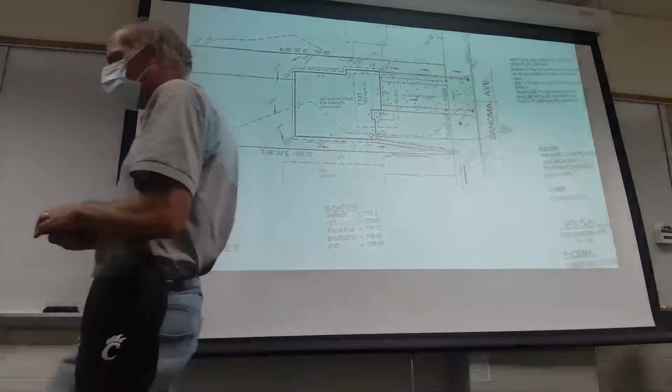It's a nice little introduction thing. This is residential. After we go through this and get a break, we're going to look at a commercial job a little bit. For right now, we just want to start here. I don't expect you to know everything on these papers. In fact, let me do this: look at it for about 5 minutes while I go make this into smaller form. I'm going to print this smaller so it fits on the overhead projector better. Otherwise I'm going to be sliding that thing all night long, and I don't want to do that. Just kind of look at it.

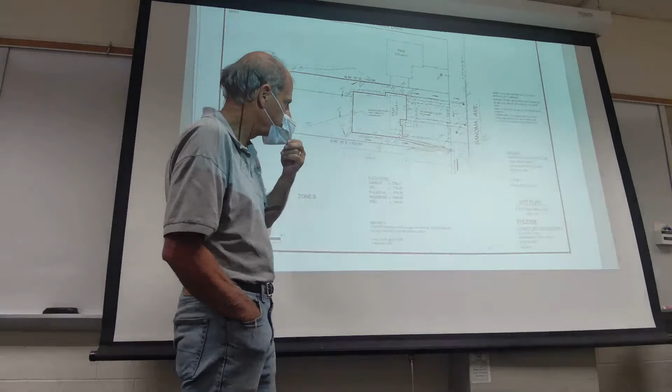You can see the perimeter, the outline of the thing, and some of the setbacks happen to be in, what is it, Madeira, I believe, or Madisonville. One of those places out there has some screwy setback requirements. They actually measure to the gutter line, to the overhang, where the rest of the world measures to the foundation line.

So in that case, I probably, because I think that's kind of a dumb rule. Not that I don't understand what they're saying, but it's just not typically done that way anywhere else. So they actually have a gutter line dimension setback, front, side, and I guess I did the rear too, just to be kind of snotty about it. But most of the time you're looking at the actual foundation, the outside of the foundation.

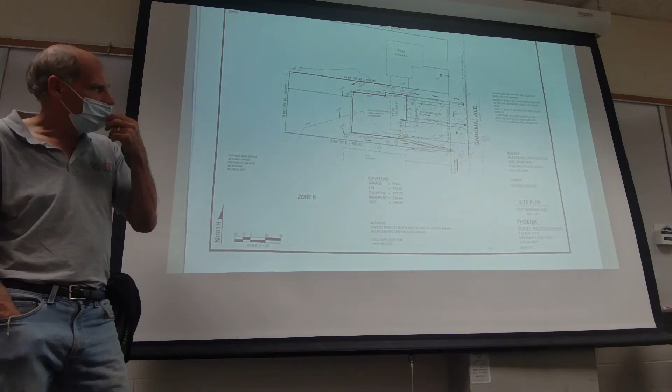You can see the driveway, and we can see where the main is, that's usually a pretty important thing, out near the street curb, in the right of way. It talks about the slope, and there are a lot of requirements to make this work, as far as how much slope you can have from your basement if you've got a finished bathroom down there, how much slope the sewer needs, the slope for the garage level first.

Builders work to the top of the foundation level because it makes a lot of sense, that's what they're pouring. Once they get that level established, the building goes up above it. Then there's the basement finished floor, which is the concrete, and the second floor is probably less important, but they put that on there.

All right, so this thing's got fuzz in it, and it's bugging me.

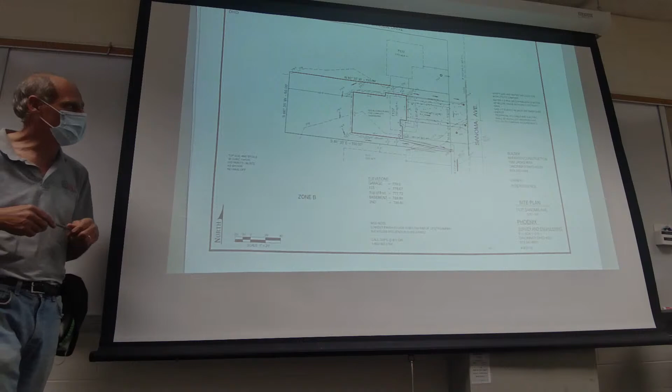So once we got the foundation, we got the elevation. Those are typically what surveyors do, they kind of establish that. Now we work with the builder and say, what do you think, where would you like to have this? But the surveying side typically gets to choose this and make that decision for a lot of reasons.

One simple reason is, if possible, you want your driveway to drain out to the street when it rains. You don't want the water to run back into the house. Not that it can't, but it really shouldn't. You'll notice between the garage and the first floor there is, from 778 to 778.67, 0.67 feet of rise.

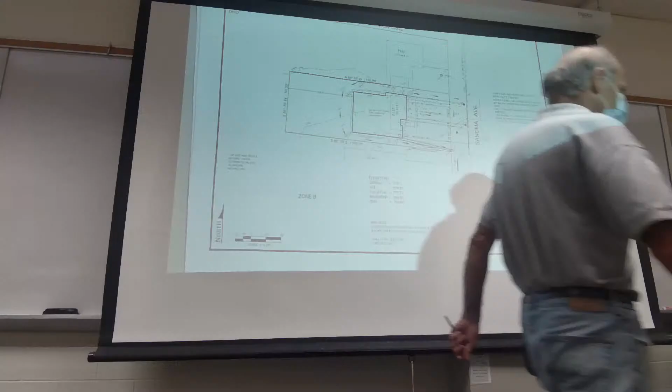Let's do this, just because it's a good exercise. If you've got a calculator or a cheap cell phone, it'll probably do this. Almost everything on the surveying and engineering side works in decimal feet, we always work in decimal feet because of the calculator, it's just easy. However, we have to recognize that builders work in feet and inches. It's common practice, it's how the world is, at least our world, and we've got to be able to interact with that.

So if we want to do this conversion, obviously we've got to do some multiplication. We know that 1 foot is 12 inches. So we can set up the multiplication like this. This little conversion mechanism works really, really well in a lot of civil engineering, technical fields, and trades. You'll notice you put feet on the bottom to cancel feet on the top. That's kind of a big deal, a big concept. 12 inches is a foot, the same thing. Technically, mathematically, all I'm doing is multiplying by 1.

That's the same unit. So, long story short, if you take 0.67 and multiply by 12, you come up with a little over 8. This is actually 0.667, but either way, you're going to come up with 8 inches.

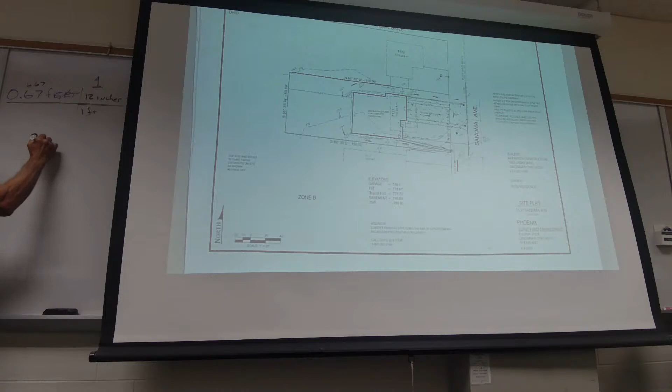And that's just kind of a standard step size. We talked about steps, kind of a standard stair size to go from the garage to the first floor. Same question: why would we not put it at the same elevation? Why would we not just make the whole garage slab and the first floor all the same elevation?

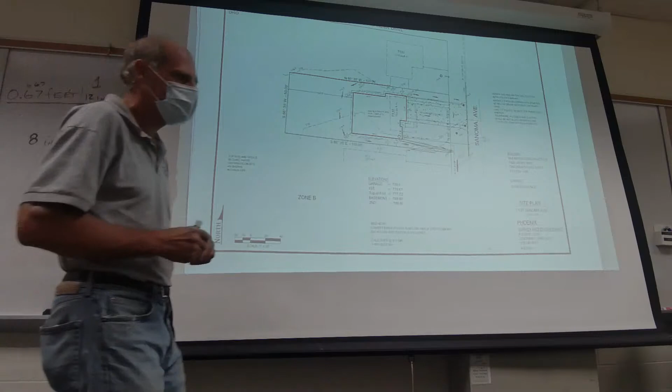For drainage purposes. Okay. Draining what? That's correct, draining what? Water. More important than gasoline or whatever comes out of the bottom of your car.

So there is actually a code that says you have to have, I think, 8 inches of difference between the garage slab minimum and the first floor. And that is, again, on purpose. It is just to make that drain away.

If we were to look a little closer at the code, this is for the architects in CET 130, but it's also for the builders who have to enforce the code. If we've got a finished floor slab, I'll find a pen that works. We have a finished floor slab.

Thinking about details, this is where my sketching stuff came in from last time. Okay, so we start thinking about details.

It's a little more complicated to actually impose that. Well, 8 inches sounds like a great idea. Actually, it's a little more complicated because the floor system is made up generally of 3/4 inch plywood.

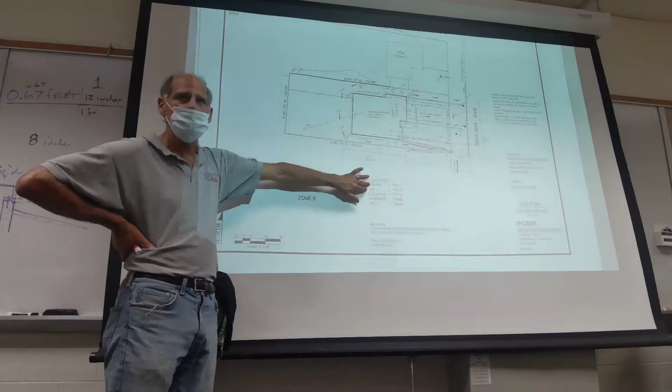The folks in job trailers, they're trying to build this house. They're making these little sketches and trying to figure out what number, how big something should be to accomplish the design. Now, with a better idea, they say, hey George, can we make this 8.5 inches? That'll work really well for us. Or the builder or somebody would have to say no, because it's outside of code.

So, oh, that's right, code only allows 8 inches. I can't have 8.5. Okay, then how about if we put in 2 steps that come out and go down? And we might say, that's fine, you can do that. And then, again, they're thinking through those details.

I don't want to get lost in that on this first day of this kind of stuff, but I do want to kind of keep putting that in front of you, that a lot of this sketching and thinking is really why we're pushing it, because it allows you to think about those details. Something as kind of small as that becomes pretty important.

Whoever just came in, there's a set of plans up here. I'll leave a couple of them over here about the sanitation devices.

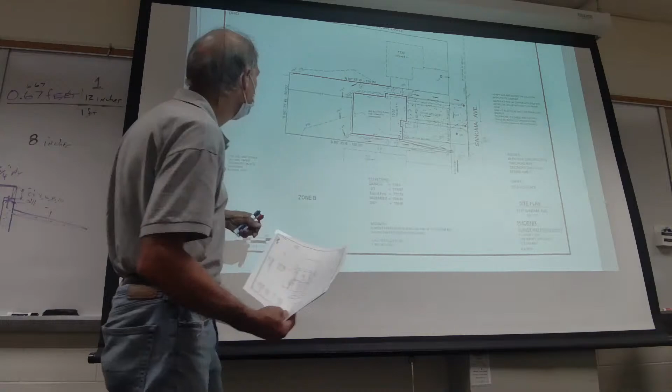Okay, I think I'm done with the first page there. Oh, the other thing I'd probably point out is these little dashed lines that sort of meander through there. Anybody know what those are called? Starts with the letter C. Okay, those are called contour lines.

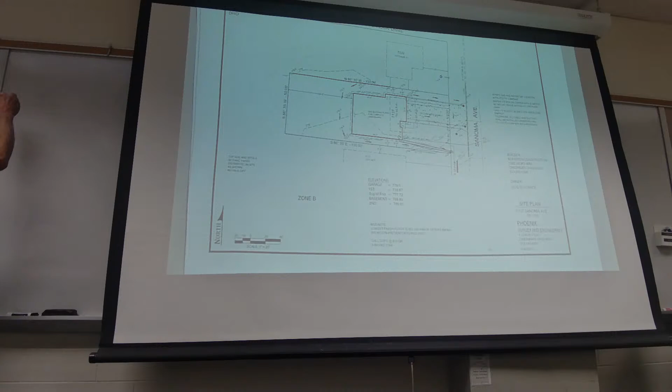A contour line isn't really a line out on the yard - it doesn't show up as something like a painted stripe or anything. But what it's used for symbolically is that it represents the elevation of the ground.

So if for some miraculous reason it were to flood to 776 feet above sea level - that's not even the correct term, but I'll use it for today - then the water would flood out above that line. What it implies is that if you were to walk along that contour, you're staying level, and that bubble should stay level all the way around.

Now, if you start to go this way, you can begin to see where the water drains - contour shows the flow of water. In fact, water is going to flow that direction. I didn't do a great job of making that a right angle.

There was an existing house - this is a little unusual, a couple of existing houses. And we had a low spot in the front yard, right at the street. So the idea was we had to start thinking about how in the heck to handle that low spot. And up here, I just sort of took it and cut it off before it got to the driveway.

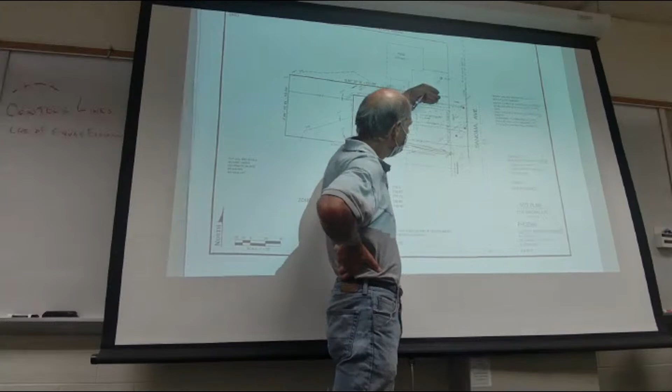Thinking about water is important. Here's why: water is the number one problem and callback on every home, period. It comes into the roof, it comes in the floor, it comes in the back, the sidewalk drains down the backyard - water everywhere.

Why it's hard to deal with is because we don't build while it's raining. If we built when it's raining, we'd see where the water problems are. But by the time we get there, all we see is a little bit of mud, maybe even have a water problem. But the reality is, it is the number one problem.

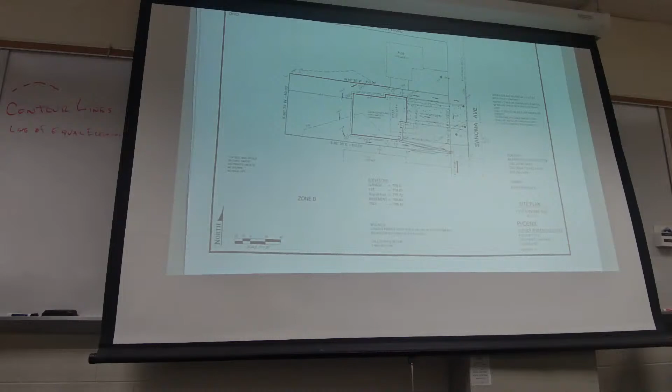Demolish a home - R-A-Z-E-D - just a word. It means it was removed, so they tore out a house and put in a new house. Pretty common in the market these days.

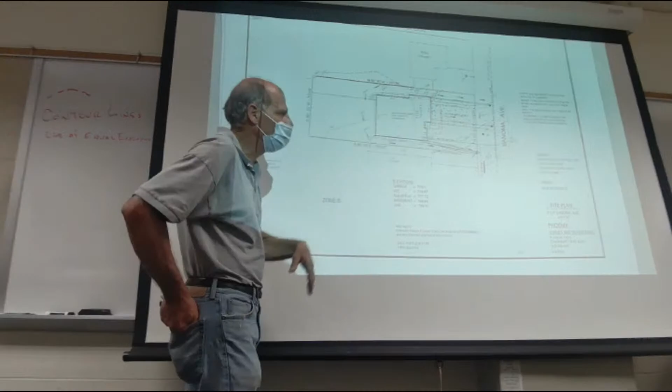It wasn't done by an engineer or architect - architect, is that a word? Now, the little details on the first page, they're on there. Again, that's just by another designer, and they like to have a cover page - they like the first page to look real nice and appealing, and then they get into the detail stuff. Everybody does things a little bit different.

And when you're in a hurry, like, 'oh, I've got to find a place to put this little detail,' that's where this stuff winds up. I'll point out, just kind of real quick, the post and detail on the front porch. I don't know that they had a deck detail. You'll notice somewhere on the front page there's going to be a sheet index.

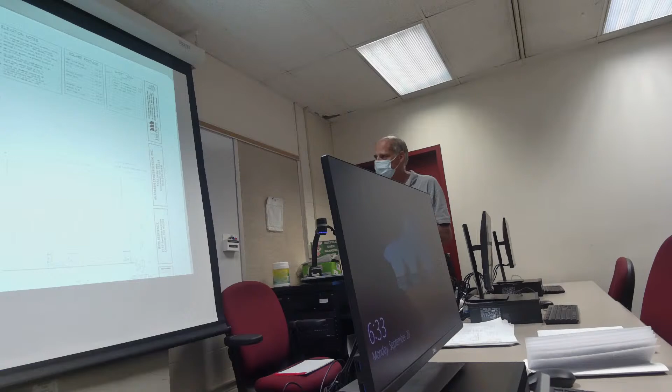So we're kind of talking about reading building plans here, but finding what page something's on is kind of important. Now, for this, there's only six pages or so - 5 pages in the site plan or whatever. But when you see this set of commercial plans I have coming up, it's a big deal - it's like a small book, and you're trying to find out where some detail might be. So going to your sheet index is pretty important.

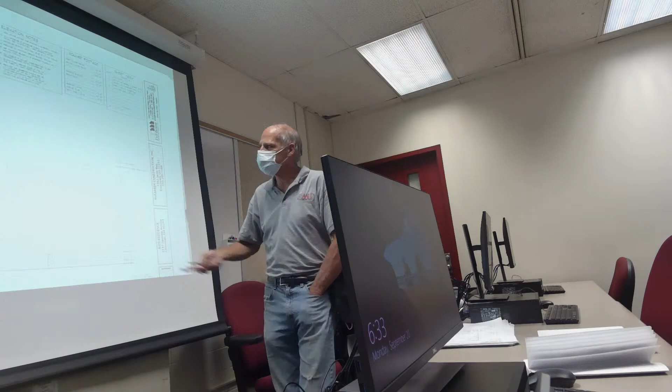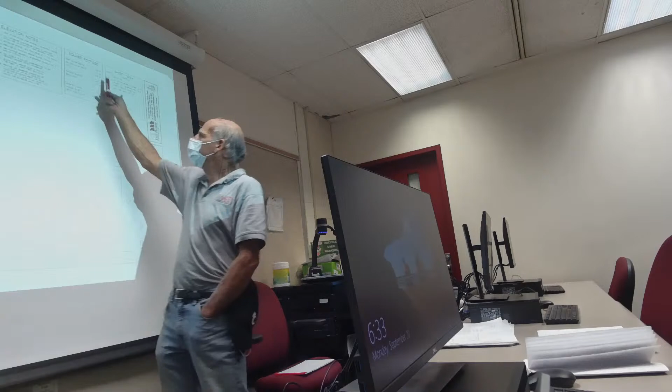And usually on a commercial job, they're organized in a particular fashion. Again, for residential, they kind of put all 5 of them together. It does go over some of the criteria - building footages, square footages and sizes. It gives me just some basic notes, and gives you a picture of what this thing might look like when it's done - is it made out of brick, or is it vinyl siding?

On the roof, what does 6 and 4/12 and 10 mean? Which one's which? The rise - yeah, rise and run. So this is also rise over run. It's almost always rise over run.

And slope comes into play again. So if it goes up 6 inches and over 12 inches, or up 6 feet and over 12 feet, as long as the units match, that's how much up, how much over. Is that steep? Is 6/12 steep? I'm not climbing on it, because I wouldn't climb one of 2/12 that's more than this high - I don't like being up high, I don't like being as tall as I am. But that's walkable.

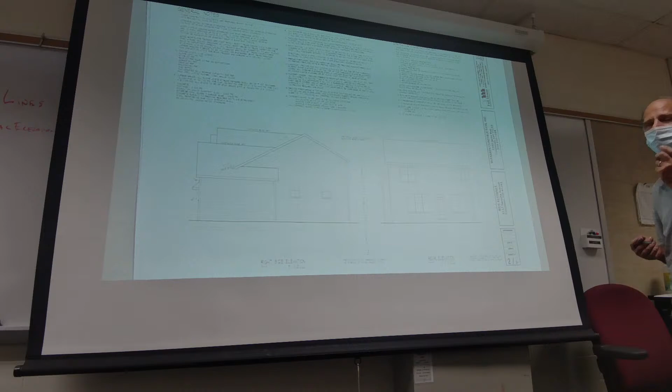Now, if you watch enough YouTube videos of certain builders, they will begin to show you some details of where you might meet the code, but you still got some issues. In other words, there's still some places that if you don't put the insulation in well, or the insulation company doesn't put it in well, they sort of slap it in there. It's not real efficient. Some negative stuff happens, things aren't sealed up correctly. So it's not so much the quality work. The idea is that it meets minimum standards, but really the name that goes on there, your name, deals with the quality.

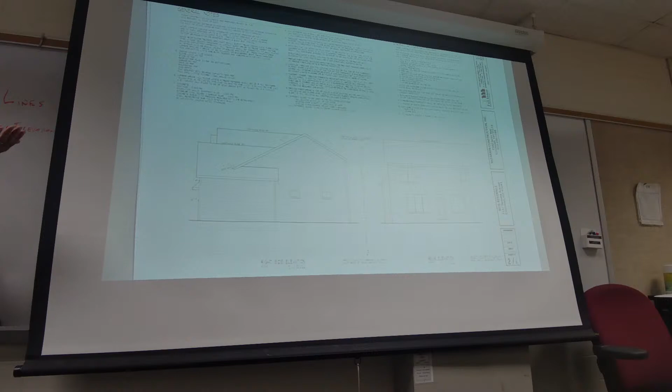Some people want it right, and some people want it right now. So some of this is philosophy. If I were to talk ethics right now, this is kind of a separate topic to that. How good of a job do you do?

Well, I'm going to do a great job, a phenomenal job, almost a perfect job. Great. Are you going to charge them for it? Are they going to pay for it? Are you willing to accept less to get it done? Will some crap happen? It starts raining, you got to hurry up, another job is coming in, something's going on - there's a million excuses, right? There's always something to deal with.

So while we talk about ethics, this is kind of a good introduction place to talk about ethics in construction, just as a start, because you have to make these decisions now before you even start the jobs. And when you're into them, you sometimes still have to make those decisions. It's some gut-wrenching things that you got to think about early on rather than react to later. So I'm just putting that as a little seed in your head. We'll talk about that a little bit more later on.

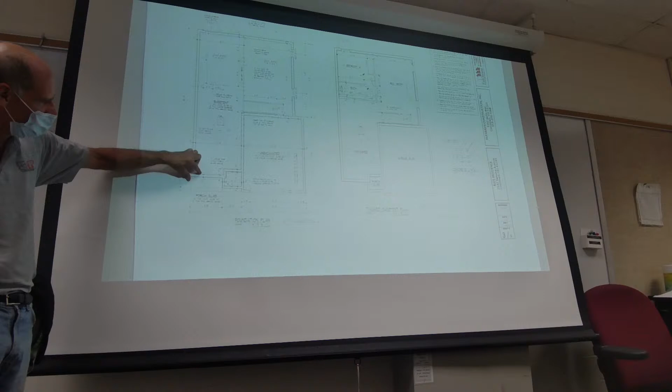Once the foundation started, I'm done. The only thing I may do occasionally is - the foundation people, they'll sort of pour a footer coming around the outside, and it's pretty sloppy and kind of big. Sometimes it's in a trench, sometimes they just trench it and fill it with concrete, sometimes they actually form it and pour it. Again, that's a construction method.

With some excavators, some companies, they like to just dig a hole. And they'll generally buy material, and they'll form up and pour with concrete - stake it or whatever, so they'll form and pour their footers this way. And then after the gravel and the paint and all that other stuff, it goes back in there.

Some decide, let's just go for it here, and we'll actually trench and then just slop fill where the foundation, where the footings go. So there's a little different approaches to this. Some pros and cons to all of it.

Anyway, sometimes they will ask me to pin the footers. The surveyor will ask me to pin the footers, and what that literally means is I will go and drive a concrete nail in the still relatively soft concrete at exactly the corners. I actually put those in there. That way, when the foundation crew comes back, they'll take the forms and literally put foundation form work right up to that nail, from over 8 or 12 or whatever the foundation wall is. They'll put that foundation right on there, snap a chalk line, keep it straight, that kind of stuff. That's what they call pinning the footers or pinning the foundation.

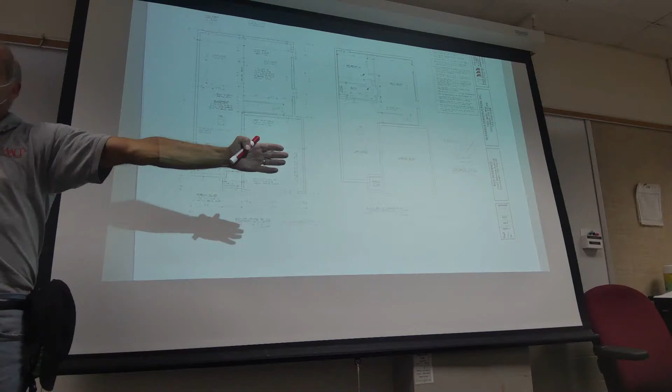So a square edge is kind of a handy thing to have on a home to make it work right. That's another reason why sometimes they will hire me to pin the foundations, just to keep it all together - because you can still have a dimension of 48 by 36, but it could not be at a 90-degree angle. It's time for a math question.

What is that overall dimension? 37... 4, 34, 37. Let's do this. I like math.

Let's just do this - I'm going to remind myself, your first semester students. Okay, how long is that wall? 46 feet nothing - that line is 46 feet 0 inches. Correct. Now, as I implied there a minute ago, it is entirely possible to have those two dimensions and not have...

One technique to confirm square, if I can get that sort of going across there like I want it to go. A little out of practice in the last couple years here. I like that.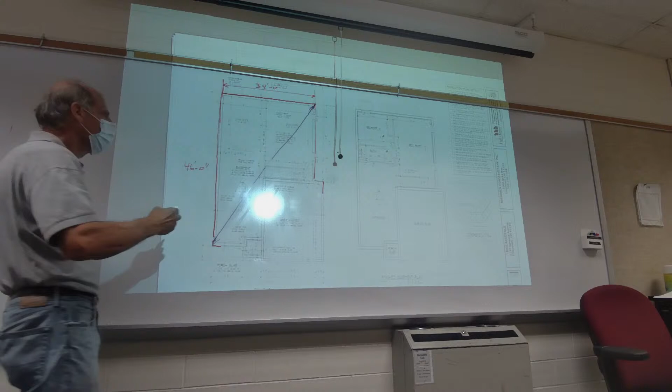One technique is to find Dr. Pythagoras - he wasn't a doctor - use the Pythagorean theorem and tell me what this distance should be. We did this in math, I remember, a squared... yeah, that's the feller. So if we're going to find c by itself, what do we got to do?

Take the square root of both sides. So c, this length, the hypotenuse, should be a squared plus b squared. Add it together, take the square root. I got a calculator.

According to this, if I take 34 and square it, 46 and square it... take the square root. Good, something neat happens. I wanted that to happen. Which number do you get? 57.201.

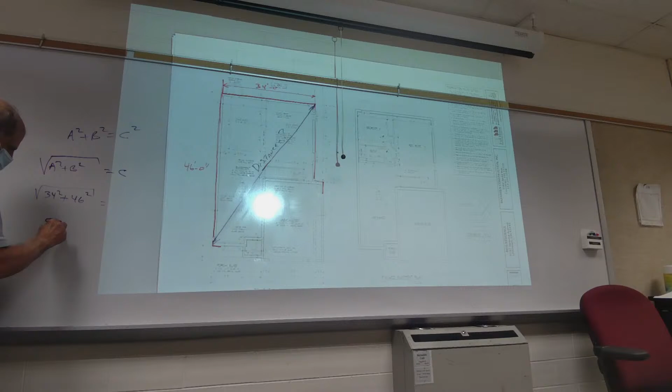What'd you guys get? 7.20 - is there one more decimal in there? 201? Yeah. Okay, 57.201 what? Feet. Okay, so it's 57.201 feet.

Great. Went to Home Depot, bought tape, and it was in feet and inches, not feet and decimals. Now in my truck I keep a feet and decimal tape because everything I do is in decimal. But y'all don't have that benefit.

So I don't know if you remember this from last week, or I think we talked about it - how many inches is that? How would we convert that back to inches?

.201 - what if it was 0.5 feet? How many inches would it be? It was a half a foot, 0.5 feet. How many inches would it be? 6, we all know that. What did we do mathematically? We went from 0.5 to get 6. We multiplied the decimal by 12.

Okay, so that thinking process I was messing around with you there is really what I do. I think this stuff through. I use examples sometimes when I don't know something - I'll look at something I do know and apply the same technique. So long story short, if we take the decimal and multiply it by 12... buddy's got the calculator, keep doing it.

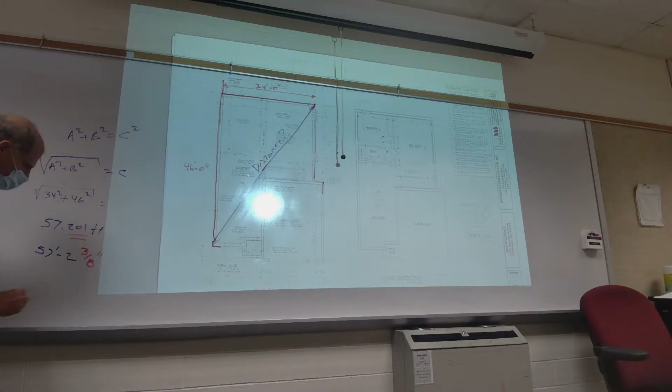3/8 of an inch. And you either got 6/16 or maybe 5/16, I don't know. All right.

So now we've used our head and a relatively cheap calculator, and we can pull the tape. It had better be 57 feet, 2 and 3/8 inches. And if it's not, you're out of square. If you get it too big, you're out of square this way. If it's too small, you're this way. You got to make an adjustment to square it back up.

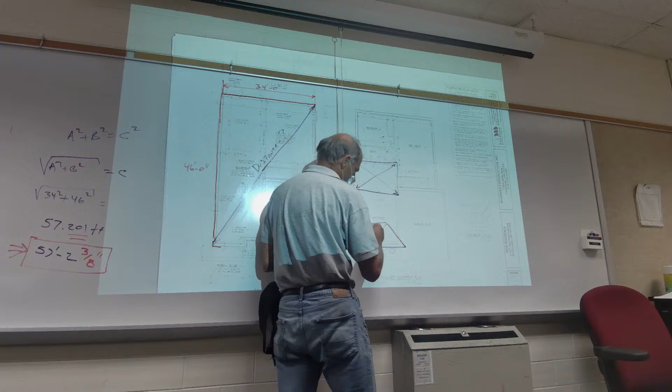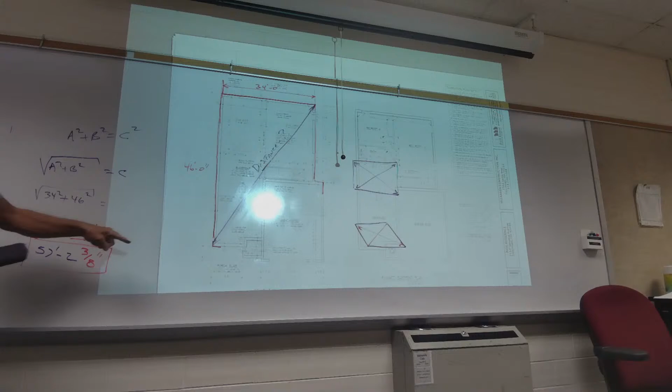A lot of them are okay and know enough to measure across the diagonals, and as long as the two dimensions are the same, it doesn't matter. If you measure across your diagonals and get a different dimension, one's going to be shorter and one's going to be a lot longer, and you're going to say, oh, it's not square. So they know enough to measure across the diagonals and get the same number, but none of them can do Pythagorean theorem. And there's a whole lot less of them that can convert that from a decimal into a fraction.

A fraction that we can use, like 2 and 3/8 inches, or 2 and 5/16 inches, or anything like that. I'll also tell you, if you've got an app, if I was going into construction, I put an app on the phone to do feet and inches, feet and decimals, do that conversion. It's pretty necessary all the time.

All right. Well, that was fun. Oh, boy. I'll not say that. I'll put it there.

Here in the garage area, it says unexcavated. What the heck does that mean?

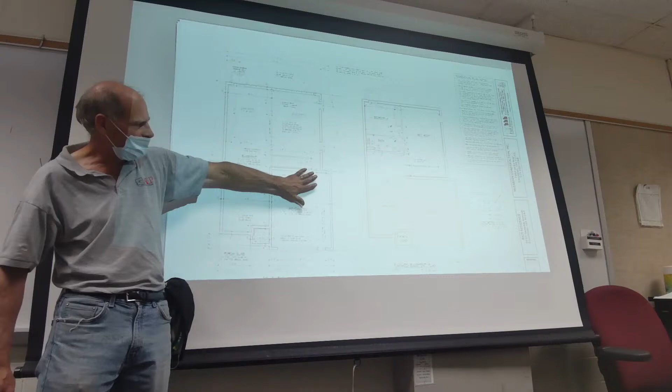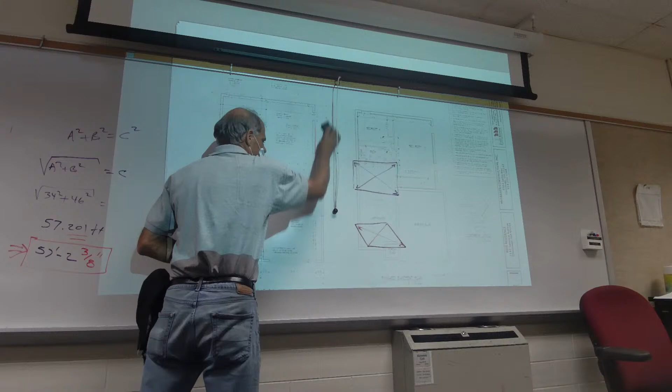Any idea? This slab above -- yeah, or I guess if you think the direction, it's still part of the foundation. This is deep. This is shallow slab nearly on grade for the garage area. So this wall is a deep wall, this wall is a deep wall, so it's shallow on top. I'll go to pictures in a minute. This happens in Cincinnati all the time.

So the word unexcavated means that we're not digging a basement underneath the garage. Well, how does that impact us? A couple of things have to happen here. I'm going to put the other side up real quick. In order to build that separation, this basement wall, the excavator is going to dig a hole. They might dig a trench here.

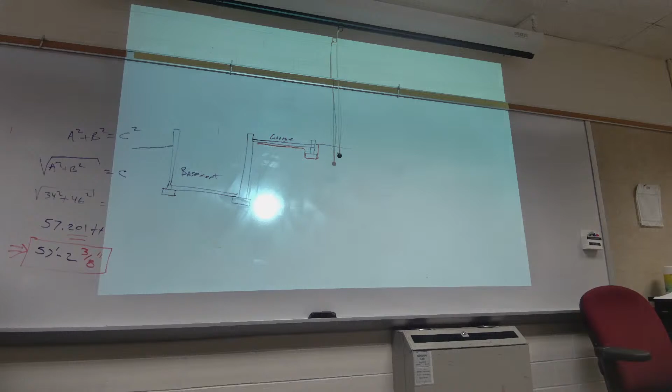They may just come back a little bit. Usually they know what they're doing. You're going to come back close to the slab. You never want to move dirt twice. You want to not move it at all if it's natural condition that you're going to be driving on. Now we've got a different situation because remember there was a house here already and that was demolished -- that's different, let's just assume a regular vacant lot. So they're going to try to keep that fairly shallow so you can just put a little bit of sand, maybe a little leveling and a little gravel or grit, and then pour that slab. That's good, that's all good.

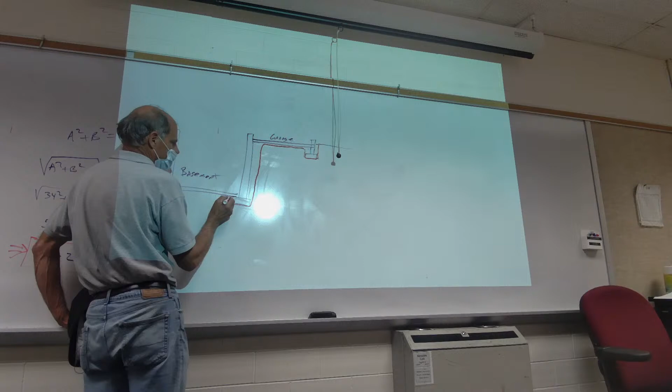This is a shallow area, usually dug with a backhoe, excavator, something small. Now this, in order to build that, depends on whether we form it or not. We have to leave some space back here, at least enough to put the forms in, and kind of tie that off maybe a little bit. So we've got to put forms in and build that footer at the bottom.

Now this is where it gets a little dangerous, OSHA-wise, because sometimes you've got 7 to 8 feet of pretty close to vertical dirt right there, and sometimes that's not the most stable stuff. Now it's not going to encapsulate you or come over and crush you -- it might knock you over a little bit, you'll be mad, but it's probably not going to kill you dead. It's not like a narrow trench that's going to cave in on you.

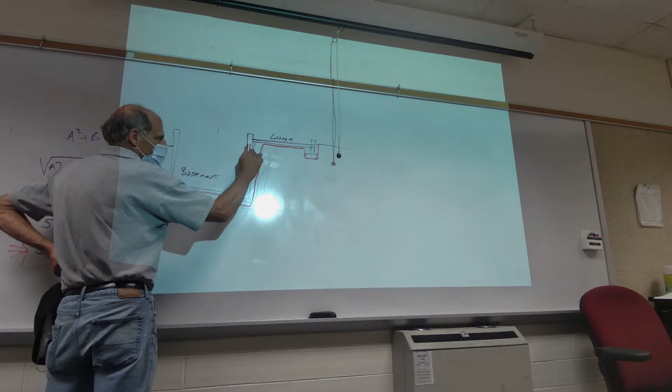That's the danger stuff, but we do have to excavate this. So now we get this void space back here. We still have to get the formwork in. What happens is you usually have a pretty good void back here, and you start to fill this in. So we pull the forms the next day or so.

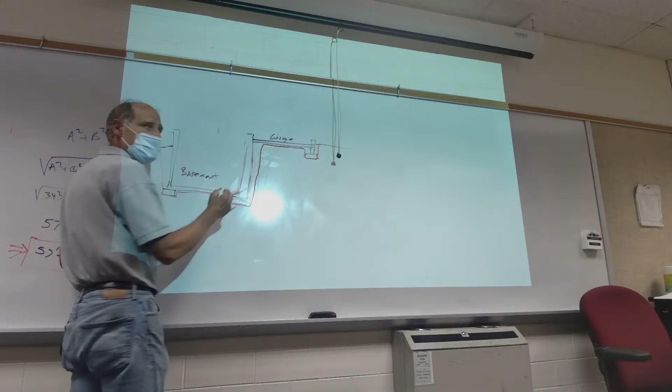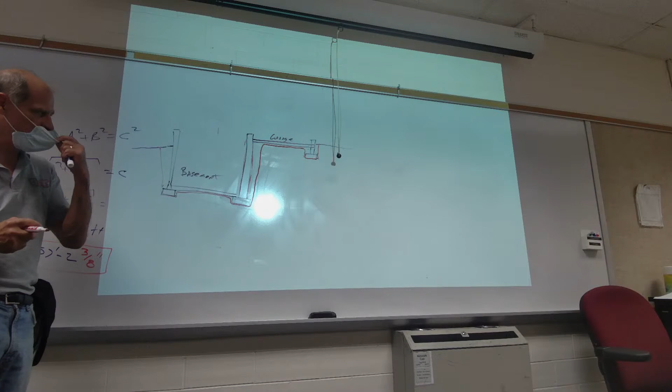Give it one day -- this concrete's still pretty green, it's not cured. Notice I didn't say the word dry -- the word is cured. This concrete isn't cured, dry, it's still starting to set up, but believe it or not, it takes 28 days just to hit sort of a baseline solid, baseline good quality. After about 7 days, it's probably about 70-80% of that 28-day strength. So it's still pretty fresh, still pretty soft, relatively.

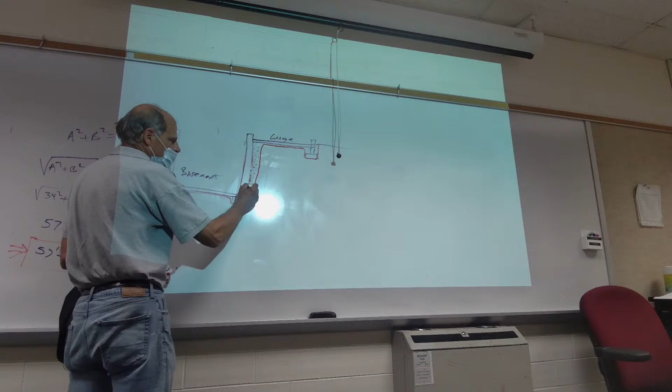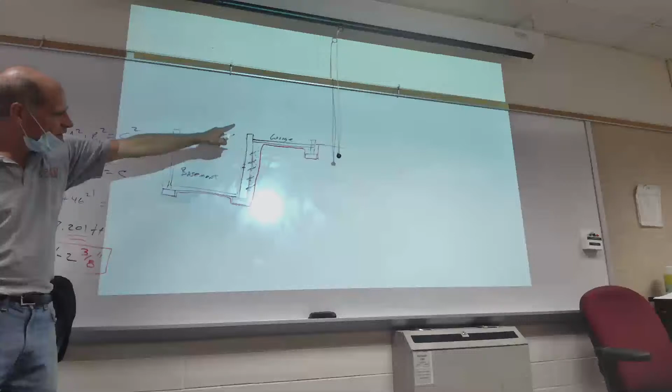But we're trying to get on with business here. A lot of times the builders will pretty quickly try to backfill that thing, and whenever you start to press down on this or anything like that, a lot of times you start to see some cracks develop on those really long walls from that backfill, because your machinery is going across it, trying to backfill it -- it's kind of pressing it out and all that kind of stuff. Really the same thing happens on this side, but this seems to be a little worse because the garage has car loads coming in all the time.

You start to see that more as this soil or whatever. Again, not part of the class, but something to throw at your head just to get you to think about some of these details. Kind of important. Let me press through the rest of this thing here and we can get into something else.

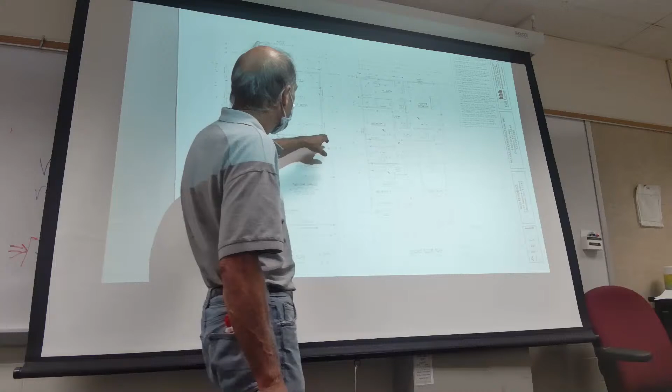And then we see the second floor, again, same thing. Greg's elected to put both floors on the same page because it fits pretty well, and it's nice to see how things overlay. Here's what I mean. It's nice floor, but interestingly enough, Greg's got this big bathroom stuff going on over here. On the second floor, with the master bath, we've got a couple of lavatories, we've got that big fancy tub, we've got a toilet, we've got a shower. Okay, so we got all that stuff there.

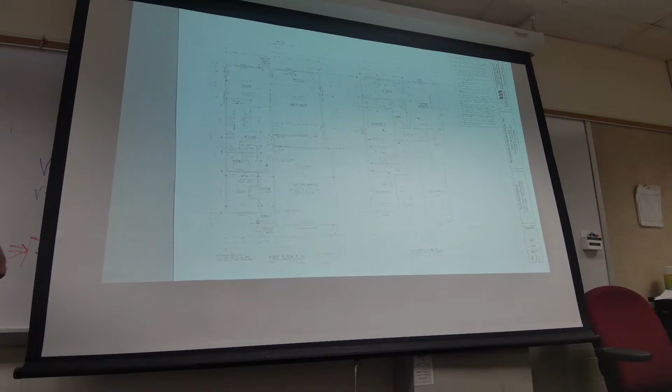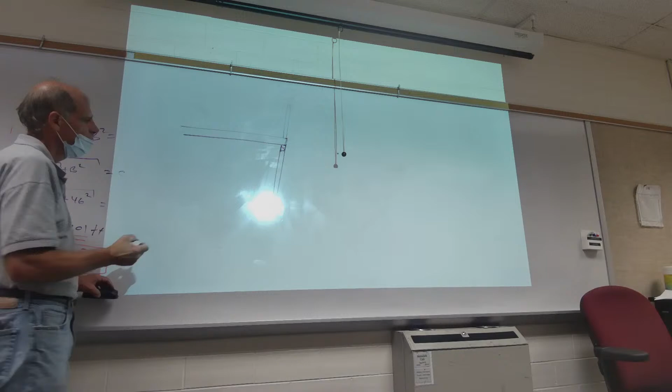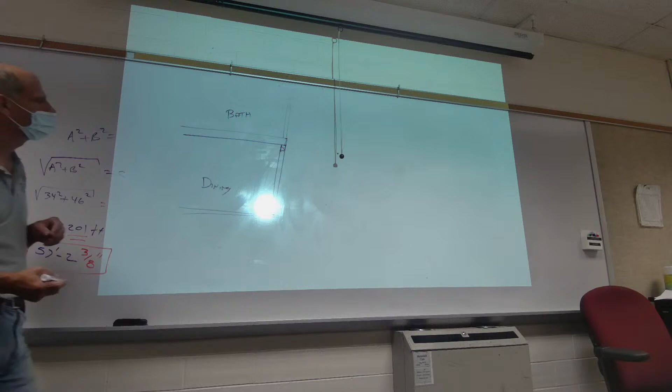So we've got our floor joist, we've got our wall system, our outside walls. 2x4, probably maybe 2x6 construction, maybe ridge and walls. This is sitting on the floor, or a bath up here. This is all the fancy bath stuff. So we got a toilet. That's good, fine, nice little toilet.

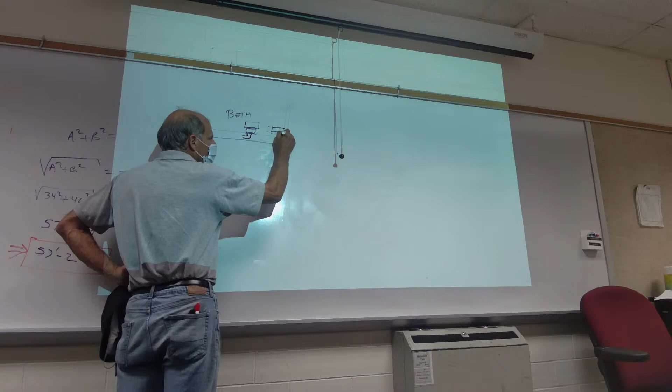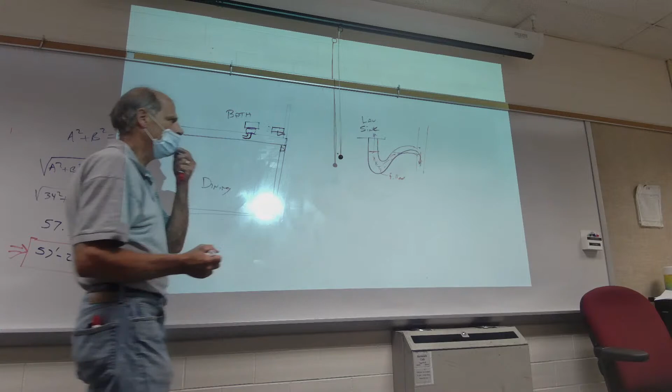So the idea here is that this stays filled with water, and then again this goes into the wall, which goes into a pipe where it goes down. So if it weren't for this trap, the fumes that come out of a sewer would stay, and they could make their way back through here. And if there were no water, or if this was just square, it could make its way and come into the sink area, and it could be kind of smelly, almost noxious. It's like, oh, this is no good at all - it smells bad, etcetera. Okay, so the trap is for that purpose.

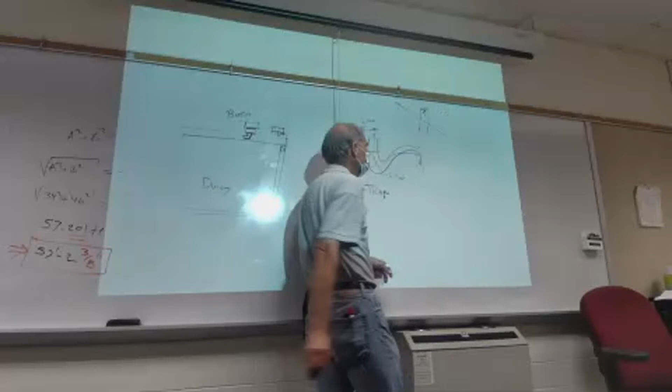It goes through the roof. What's that called? Okay, called a vent. What's its purpose? Twofold, I guess, actually - there's a reason you may know what that reason would be.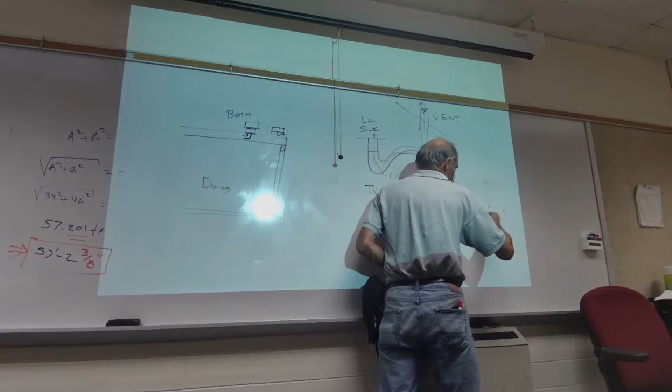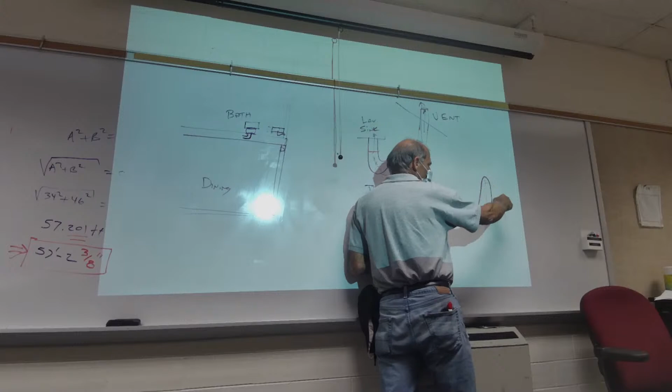So if I've got an aquarium sitting up on top of the tank here, if I take this hose and I take both ends and stick it, and then let go, this water will siphon itself out. It will literally climb up and over, even though it's down here - it will climb up and over and then come out. To stop that, you pull this water, it sort of goes in here, it creates like I'll call it a plug of water, and it siphons this thing dry.

If it weren't for a break right here, an air break, literally a hole, to equalize the atmosphere, it would drain that thing dry, and then you're back to the stinky fumes coming in. Take a soda straw in a cup and poke a little hole right there. You could not suck out anything. It will not work. It's called a vacuum break.

So sometimes it's fun. We used to do this to people we didn't care for a whole lot. We'd poke a little hole in their straw and they couldn't get anything out of it. Right? It's just a little simple vacuum break.

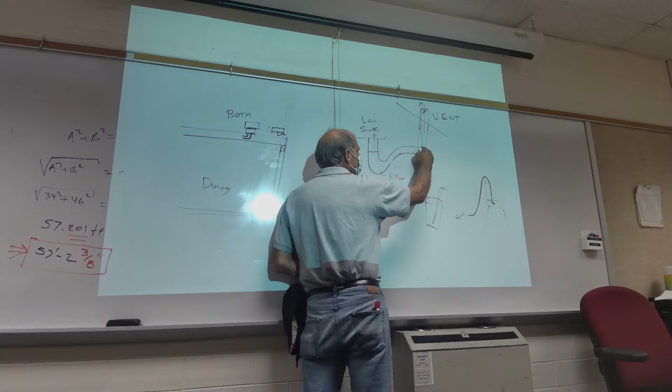So the building code, the plumbing code, requires that you have this vent in here so that the P-trap doesn't go dry and then the fumes could make their way back into the living space. All right, that's not what I wanted to talk about, let me get back to this at hand.

I've got a toilet and it's got a big pipe in it. Now I don't know which way that one back there goes, we got one pipe outside, but we also got a plumbing chase. We got a plumbing chase, but we got plumbing outside the plumbing chase. Oh well, it's maybe a column. Okay, so maybe it's not a plumbing chase. Sometimes you'll see stuff that looks like a plumbing chase, and the pipes are actually outside of it, so they just box them in. Well, that's nice, except in your dining room, you may not want that because some of the furniture doesn't fit. I don't know, I'm not a house designer too much.

So I will assume then that they want to bring this down into the basement where it eventually goes out, through the dining room. So we have to hit the joist space. Well, as long as the joists are going this way, you can get there. Sometimes they take it into the next joist space. Maybe it's just the way it has to sit, maybe the way it has to fit in there. There's 100 reasons.

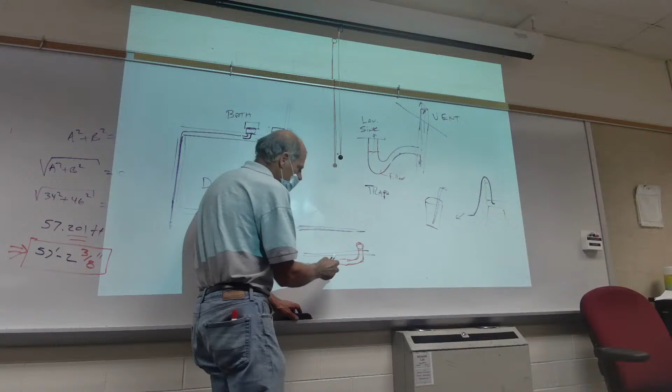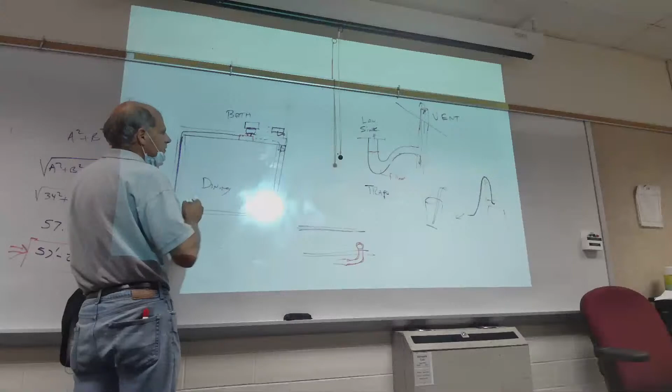I said all that to say this: sometimes plumbers will just simply notch out that joist and run that pipe. I bet you've seen that more than once. They will notch out that joist. How do they do that? They get a sawzall, man, they notch that thing, it'll go like a hot knife through butter. So they just notch that joist out and run that pipe through there, and now you can run it if you want, and away you go.

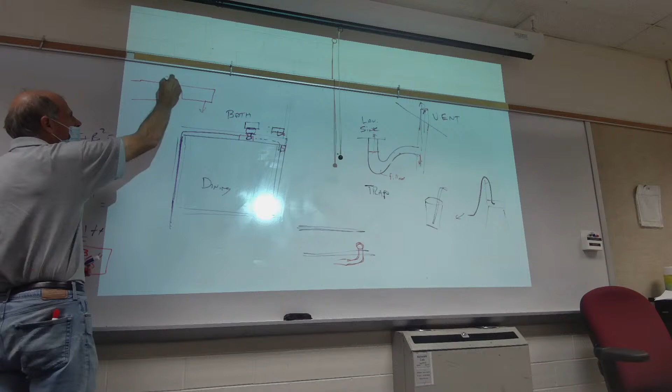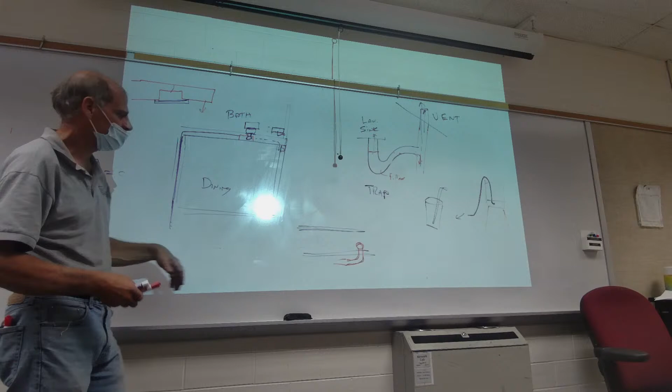What do you think the structural ability of that joist is now? You destroyed it. All your loads coming across here, especially the sitting-down load, right? So all those loads coming across here, this thing wants to fail right there. Sometimes they make me come back as an engineer and come up with some sort of system, generally some sort of strap or steel on the bottom that holds that thing in. But it's a pain in the rear end, and it still needs drywall, it's just sometimes a mess. All right, so notching a joist is a big deal. There are a lot of people that work in the industry that don't know that, or they know that but don't care.

Two more things, and then we're taking a break. Might be on the last page. Should be near the last page. 2, 3, 4, 5, here it is.

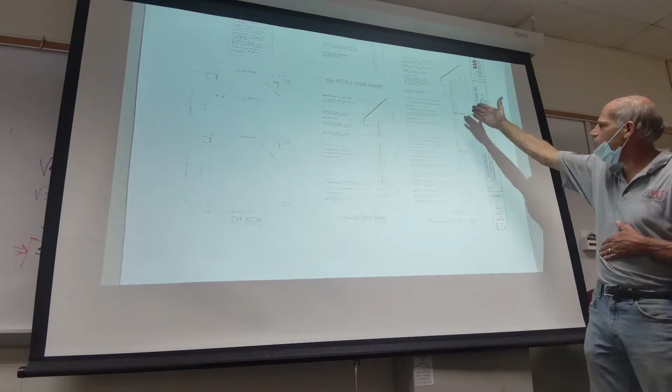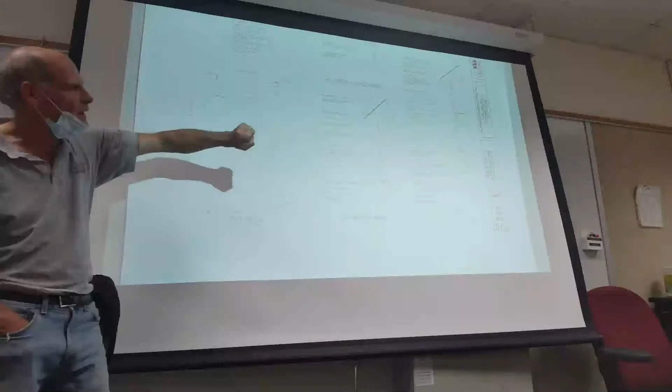So here, a typical wall section shows everything from the footer and the steel, some of the foundation steel. We start to see the joist, we see the sill plate, we see the insulation, we see that it's not brick in this case, that it's a vinyl sided house, it's got some sort of cladding on it. We see the second floor, we see trusses start to tie. Sometimes they take it just through the basement or through sections, and they typically just cut and paste those in. So they'll have one for brick and they'll have one for siding. They'll have one where this is a typical panel height. All 2x4s are 8 feet long.

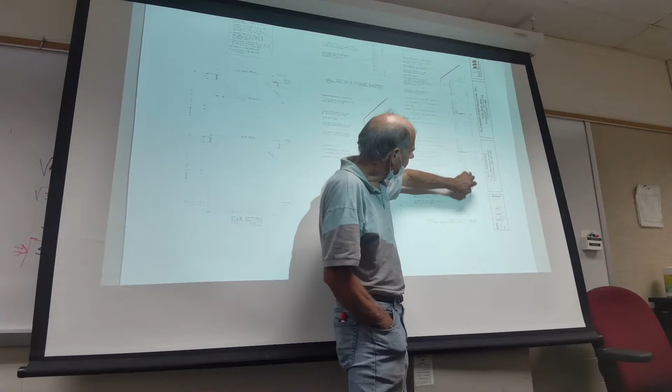Another little detail, all right, something to think about. We've got a sill plate at the top, a stud, a sill plate at the bottom, sometimes two like in this case. We'll have a stud in between them. And we say, so we got it for panel height. What's the panel height? Let me look a little tighter to see. We have a panel height of 9, 1, and 8. Unusual. And upstairs is 8 feet, 1, and then 8.

You think ceiling drywall first or the wall drywall first?

You made that exactly 8 feet of stud from stud to stud, and you got this 8-foot drywall. It's a little tight and it does fit, and it starts to snap, so they leave a little bit of extra. Some people only leave a half inch, some leave an inch and a half, but they leave a little bit of extra because the bottom is going to be covered over the runner, the molding or whatever at the bottom. So they'll take the top piece of the ceiling, put that in, there's a half inch. They'll take the next piece on the wall, kind of butt that up against there.

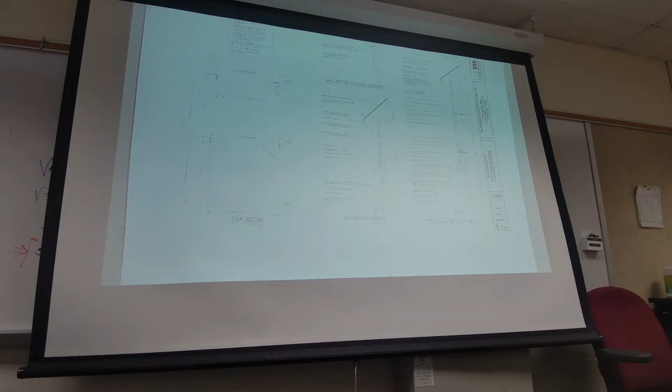Here's what I'd like to have you try. Now you've got a reasonable set of plans, you can kind of see yours a little better than I had on the overhead, okay? And you get to be the teacher, or at least the question asker. Okay, you get to be the question asker. Now the bad part is you have to be the question answerer too. But what I'd like you to do is come up with, let's say, two questions from the building plans, kind of like I was throwing out at you maybe a little bit.

But something, you know, I don't care what page you pick it on, but you've got to maybe lead me to it or help me find it, or tell me where I might look, like according to the front elevation, blah blah blah, or according to the foundation plan, blah blah blah, or what page is the foundation plan on? Write the questions down, if you would. And then put the answer down. Try to word it well, don't just give it a little thought, try to word it well.

And tomorrow I'll tell you how good my day school students do. I'll give them those questions, I'll pick two or three or four of them, my day school students.